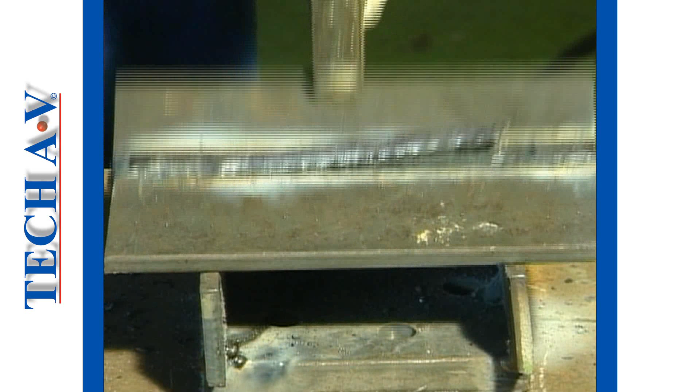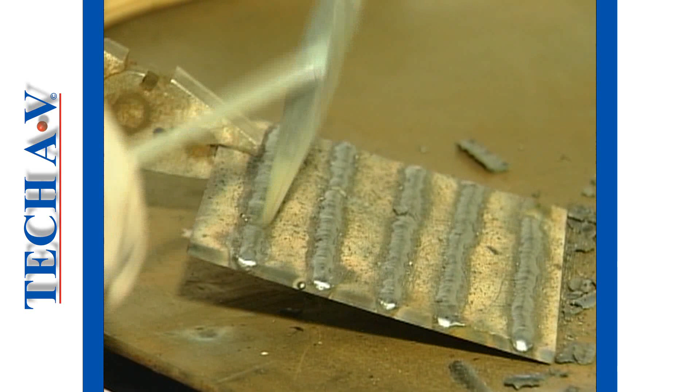If you have made a very good weld, the slag will come away easily from the bead. It must be noted that slag should be chipped away only after the weld has had sufficient time to cool and the slag has hardened.

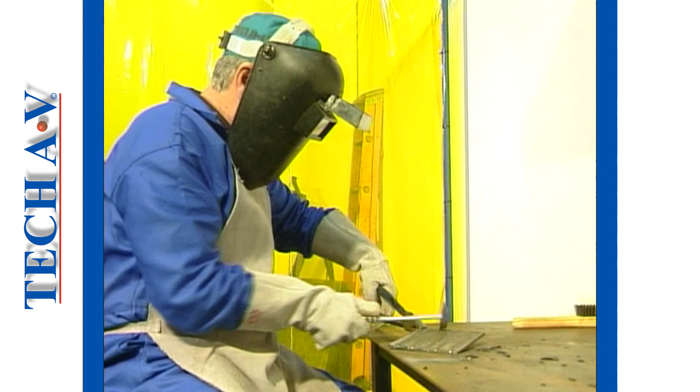In many cases, however, the slag will not separate easily, and considerable chipping may be necessary. It is for this reason that you should wear your welding mask with the visor lifted up when chipping.

Further cleaning and removal of loosened particles is achieved using the wire brush. Having cleaned an existing weld, we are now able to examine or read the weld.

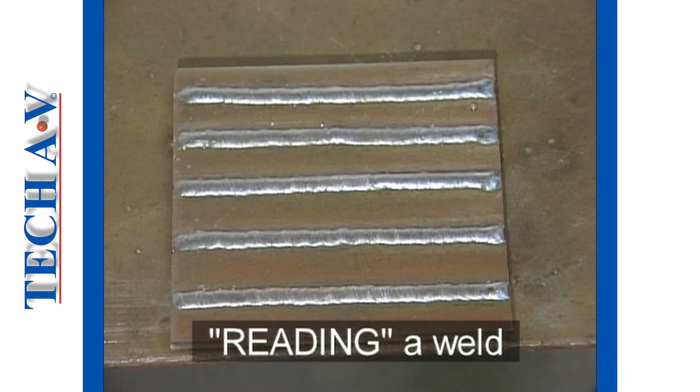The term reading a weld is used to describe the act of closely inspecting a weld and determining what, if any, corrective action we must take.

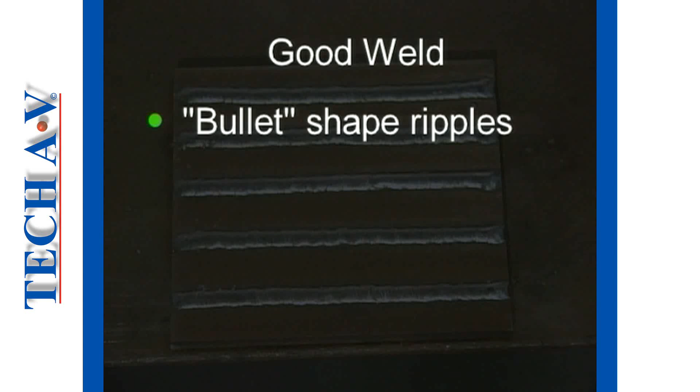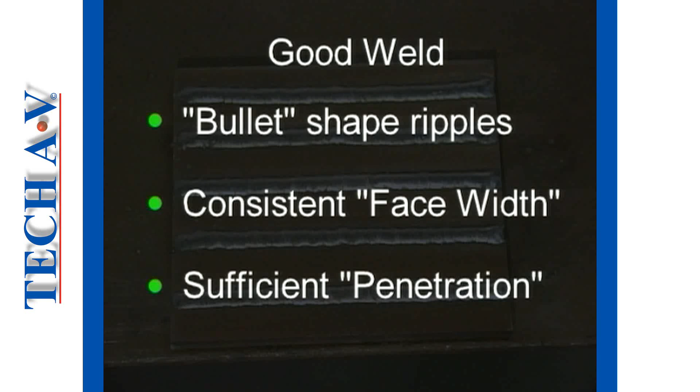A good weld has the following characteristics: bullet-shaped ripples spaced fairly evenly apart, a consistent face width of between 2 and 3 times the diameter of the electrode wire, and sufficient penetration into the base metal.

If we look at the shape of the ripples on this weld, we see that they are bullet-shaped or C-shaped, and that they are fairly evenly spaced. Further, we can see that the bead width is consistent and approximately 3 wire diameters across.

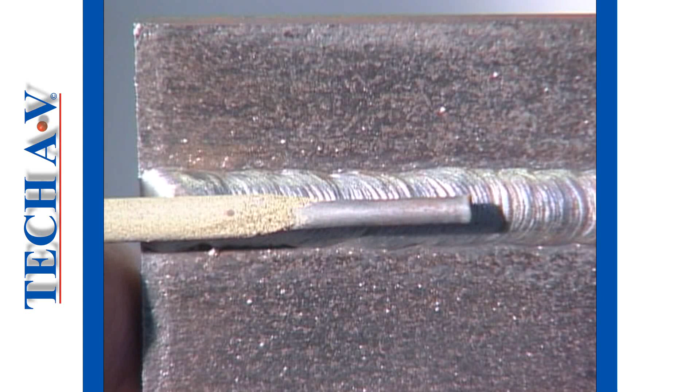If we were to view the weld bead in cross-section, it should look like this.

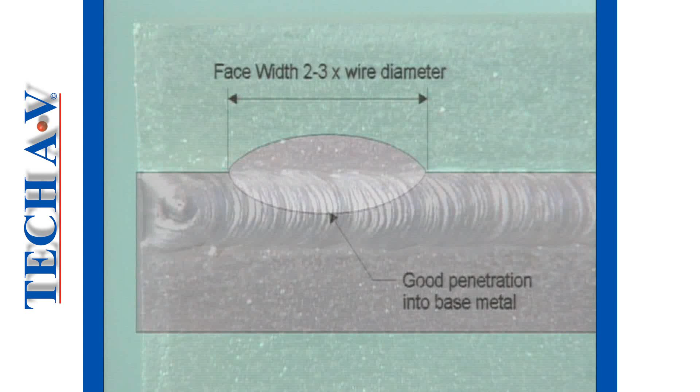A good weld is the result of combining 3 critical elements, namely the correct welding current, the correct arc length, and the correct speed of travel. If any one or all of these critical elements is not correct, then the result will be a poor weld.

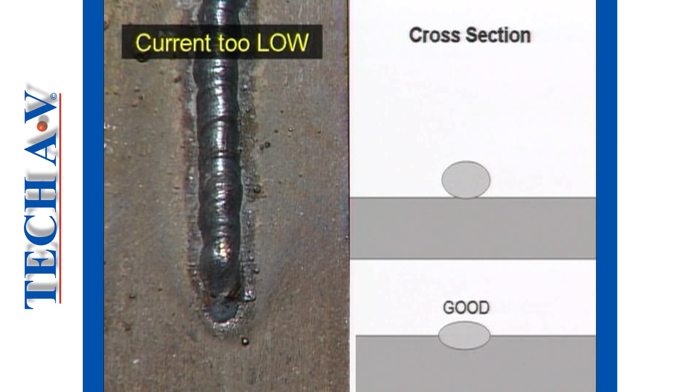Let's look at some examples of poor welds. In this first example, we see the result of welding using a welding current that has been set too low. The bead has not penetrated the base metal owing to insufficient heat being generated in the metal.

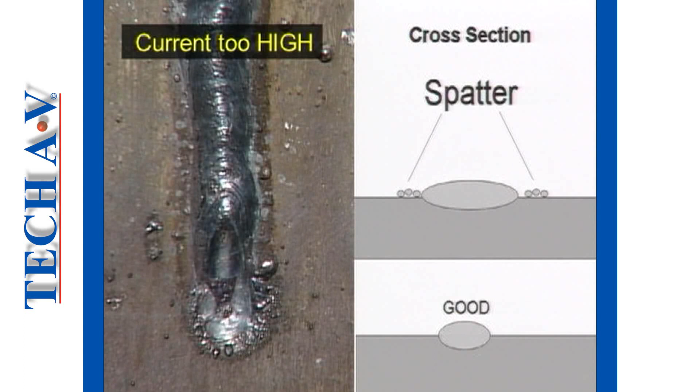In the next example, we see a bead that has been laid using an excessively high current. Excessive current results in a bead that is too wide, too low, and full of spatter. Spatter is the term given to the little metal deposits formed by the cooling of sparks that surround the weld area.

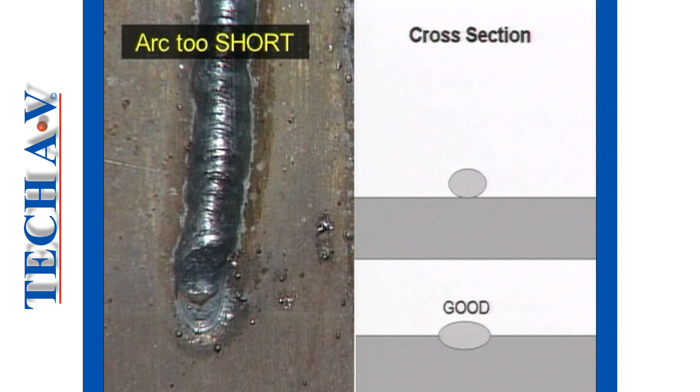By contrast, an arc that is too long will produce a bead like this. Note the undercut at the edges of the bead, the untidiness of the ripples, and the excess of spatter.

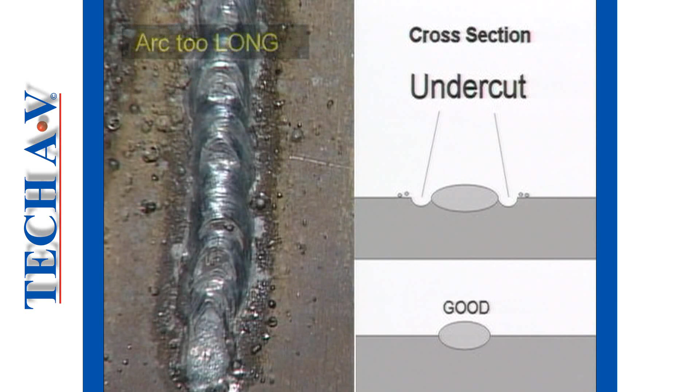The next example illustrates the result of traveling too slowly with the electrode. The bead is wide, the ripples are flatter than normal, and the filler material is built up excessively.

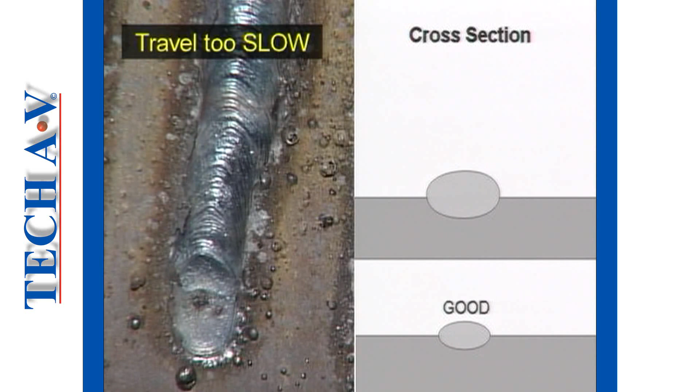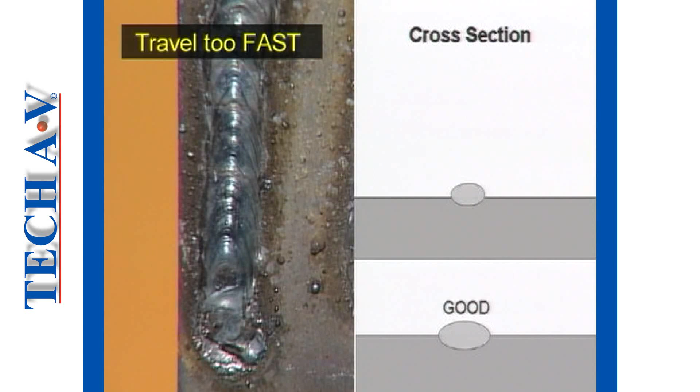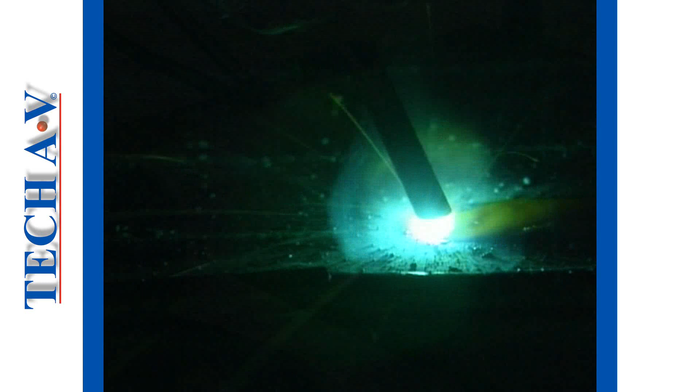This concludes Video 1 of Program 3. Practice reading your own welds and make the necessary changes to your welding until you are able to consistently produce a good stringer bead.